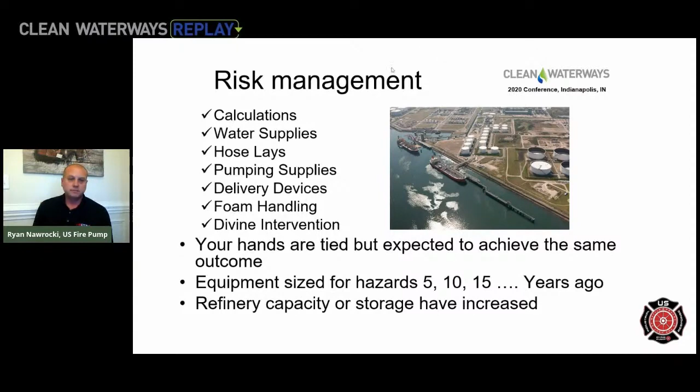So when you start looking at what it takes to put together, if you don't have fixed systems on the tank—and even then, fixed systems, if they're not actuated early on, most fixed systems on bulk storage tanks are made for rim seal protection. Once it goes to a full surface fire, the likelihood of a fixed system succeeding goes way down. So if we have to set up for an over-the-top or type 3 attack on a tank, what's going to come into play?

Is the current firewater system intact enough, and are the deluge systems activated on other tanks or other areas inside the dike area? Can we get to a static water source without having to bring in long relays? Where are we going to set up to make the foam attack? Can we spot the monitors close enough to the area? What's the range going to be?

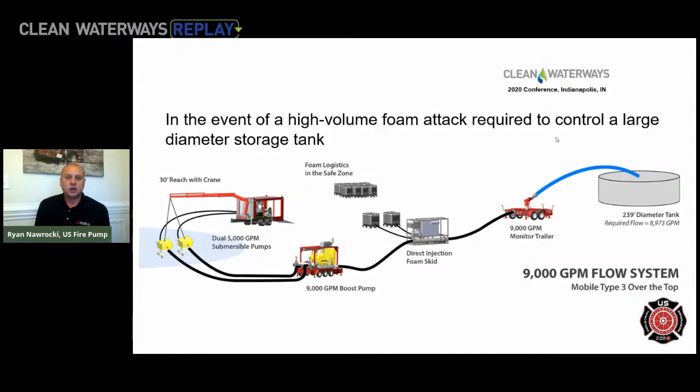So a lot of moving parts have to come into play when you start looking at a storage tank, even if it's a single storage tank. Right now, what's depicted in the picture is a 9,000 GPM flow on a 239 foot diameter tank. That does not take into effect your ancillary guns that would have to be in place, or monitors to be able to do cooling or backup in case you have a situation where the stream reach changes or you can't get effective foam coverage across the surface of the tank.

A lot of things are actually changing. It used to be the current NFPA standard was a 0.16 application rate of gallons per minute per square foot. That has since become a rewrite or revision to NFPA where that's going to be going up because they were looking at what was actually going to be out there. This allows you to look basically at what the time frame is going to be, how much you're going to need, basically what the foam concentrate you're going to have to utilize for extinguishment, and the time frame.

So maybe your standard is going to be at a 0.2 for the tank or a 0.24, depending on the size of the tank. That way you can look at, okay, how much am I going to have to flow? What are we going to have? What's our capacities and do it?

A lot of this would hopefully come into some of your pre-planning. Some of the other areas that you also got to look at is, do we have enough firewater capacity if they have the deluge system activated, or if there's other things going on. So once we know what we're applying into or what we're dealing with, then we can actually move forward of actually setting up the system.

Now, this is only identifying a single tank. You're going to take this in effect when you start adding in a potential in a dike area. If you have a spill inside there, or you have multiple tanks going in on fire, at that point, knowing what you're going to have in those areas.

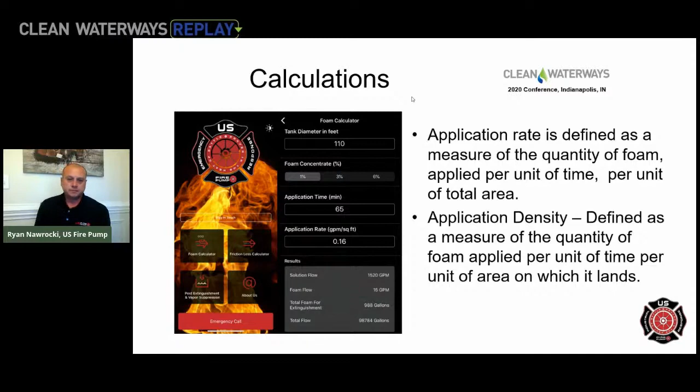So when you look at your firewater, and I kind of touched a little bit about what the firewater is going to be, most of your firewater systems are designed for your fixed firewater systems. They have a little bit more. Do they have the pumping capacity with it? What happens when the firewater pumps are down, or potentially the firewater pumps have been used for something else, if they had to use them for process water or use them for that side?

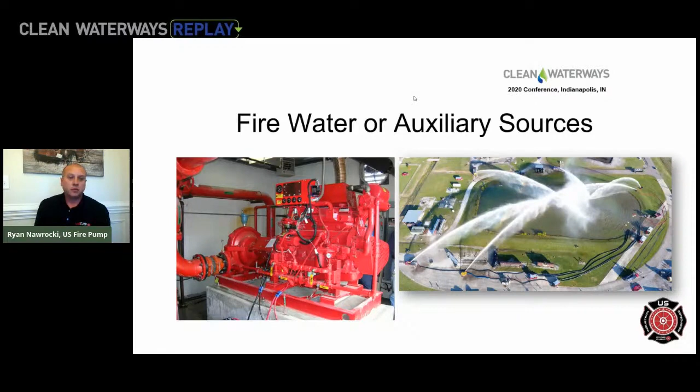Where are the other static water sources that are available? Do you have another static water source that's close to you? Do you have it in storage tanks? Do you have it in other areas that we can pull from? If you have to set up from that, do you even have the devices and the pumps to put them on scene to work with an over-the-top application if your firewater system isn't fully up, or it's being tasked at that point for capacity of the other deluge systems?

When you start looking, so now we've done the calculations and you look at your water supply. When we get into it, you look at this size tank, a 311-foot crude tank, 65 minutes, not including your cooling water. So we're going to have to be able to supply 18,000 gallons per minute of water foam solution for 65 minutes. That's 1.1 million gallons of water that you're going to have access to. Do we have that in there? Are you completely reliant on a fixed storage tank, or do you have a feed that comes in there, or are you pulling from another raw water source?

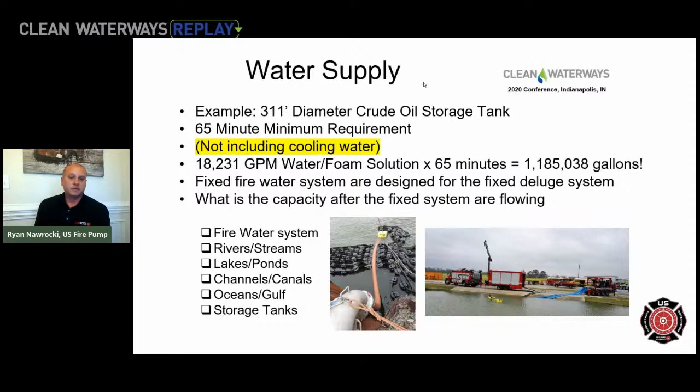The other thing to look at when you start looking at your water supplies, where's this water going to go? Can we contain it inside the area? Is it going to be able to be controlled there? Do we have other areas that we can go from? Do we have equipment that we can use for drafting, or submersibles that we can drop in to bring water up if it's above what the capacity is of the pump for drafting there?

When you look at your delivery devices, know a lot of information about the monitors that you have, whether mounted on your apparatus, mounted on an aerial device as an elevated water stream, or trailer mounted or skid mounted. What is the reach and the distance? Where are you going to have to set this up? Have you done tests on that? Most manufacturers will supply you with a flow chart and an approximate range.

That's all basically when you run the calcs, that's without foam. So you're going to reduce the range when you add foam to it, from 5 to 15% of the distance. Also, if you're not fully able to set up with the wind at your back, you're also going to reduce distance as the wind changes.

When you deal with a large storage tank, it's going to create its own type of weather around there. So knowing what your monitor can do, you can actually place it, range it, and get it in a place where you can do it.

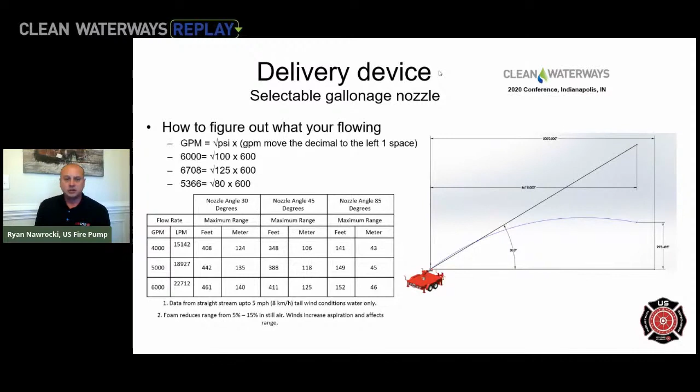Also, can you even supply it with the right amount? If you're utilizing a selectable gallonage nozzle, you need to know how to calculate: if I can't put 100 psi at the nozzle, how much am I going to get? Or if I'm overdoing it - depending on how you're making your foam, this will come into major effect on whether you're putting the right application of foam on there. If you're going for 1%, are you actually getting 1% of foam? Are you falling below to 3/4 or even 0.5%? Because you're either over-pressurizing or under-pressurizing it, so the volume coming out of that nozzle has changed.

The other thing you're looking at is your landing zones. As you get into a tank, look at the diameter where the water stream or finished foam stream is actually going to fall inside the tank. When we look at foam runs, if you have a 230-foot diameter tank, what NFPA looks at is foam can run up to 100 feet. We kind of use a conservative rule of about 80 foot for a foam run.

So basically you have to look at, once that finished foam stream lands in the tank, is it going to provide enough coverage? Or does it make more sense to have smaller streams, ones that can be controlled, land in there, get the coverage on the tank, and get a quicker extinguishment? Plus, you're looking at using less foam at that point, versus having to run longer to get your foam to seal up against the hot steel, depending on the tank you're dealing with.

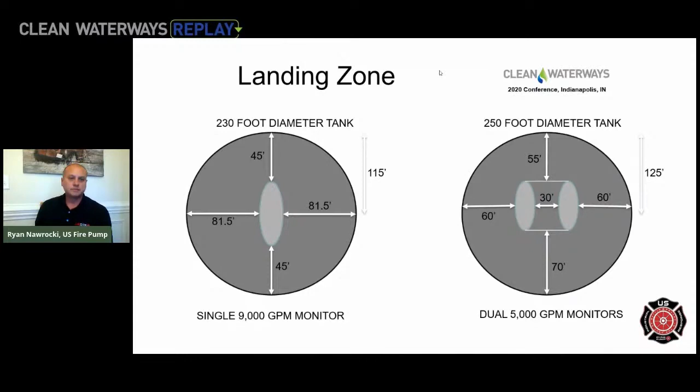Stream placement and effectivity - that's another thing. We've been talking about the range. Can you get close enough to the tank for the streams to be effective? You start looking at 2,000 gallons per minute stream, you may only have 220, 230 feet of reach on a perfect day. You add foam and everything else to it, you may be looking at a sub-200 stream reach.

You may have to look at larger streams as you get into 4, 5, 6, 7, 8, 9,000 gallons per minute - that gives you more distance, you can be outside the tank wall. Distance is always going to be your friend, especially when dealing with unrefined products. You deal with crude, you deal with other products out there - that's going to cause a potential issue because you've got to watch the time frame. You don't have as much time to deal with crude once you see the heat wave traveling through the product.

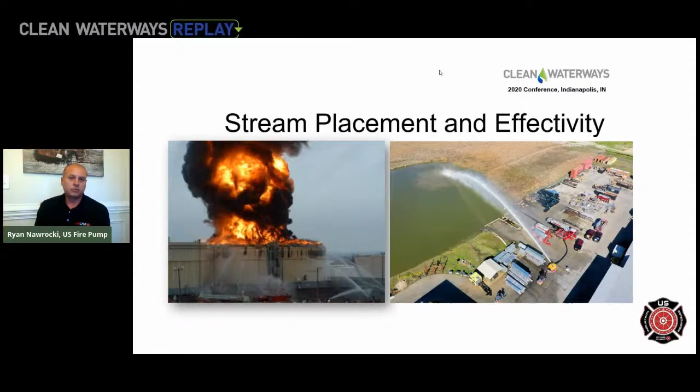Foam logistics comes into major play on these. Once you're ready and you've got your water supply established, now how are we going to make foam? Where are we going to make foam? Do we even have enough foam on site at that point to be able to handle it?

So if you're dealing with the calculations on it, you know - okay, I'm going to have to stage. Looking at a 311-foot diameter tank, for the 65-minute extinguishment shot, I'm going to need 35,551 gallons of foam concentrate to maintain a 547 gallon per minute foam concentrate flow into it.

So how are we going to do it? Do we have totes? Are we bringing in drums of this? Are we utilizing a foam pumper to make the foam? Are we utilizing around-the-pump proportioning devices?

Are we utilizing flow-based systems? Depending on how you're going to set up, can you even do it? Is it going to take that? 547 gallons per minute concentrate is a lot of foam to be able to handle with one single delivery device. Are we going to need multiple pumps or multiple engines to be able to supply the foam? The other thing to look at is time frame as you bring the foam in.

How long is it going to take us as we do it? Because once you start making your foam attack, you're going to have to maintain that foam blanket, or you're wasting the foam on the fire, on the incident, until you actually get extinguishment.

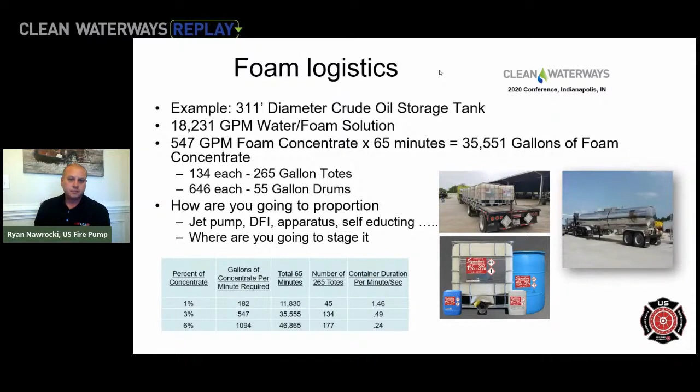What are you dealing with? We run the calcs, we look at it all the way as, okay, a single tank or this. Is it just a tank? Or are we dealing with a pump seal? Are we dealing with multiple tanks? Are we dealing with a dike fire? This is a prop that we use to kind of show different options there with it.

What happens when the crush seal gaskets give way on a tank? If it has flame impingement from a pump seal fire and then actually lights the pump on, lights the tank on fire.

What happens when you get a leak or a valve that goes out on the tank? Now you're dealing with product inside the dike area. How are you going to handle those areas? If you have to spot your guns inside the dike area, now this becomes a problem. You're moving everything back further out. So do we even have the effective reach on it?

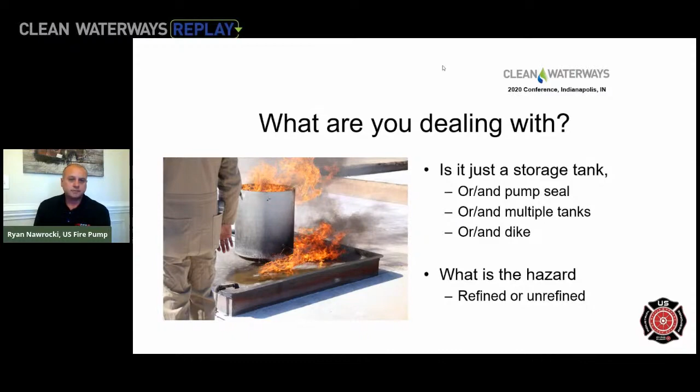Are we dealing with a refined product where we have a little bit more time? Or now are we dealing with crude oil that has a short time frame, basically once it's lit on fire, before you get into a boil over or a froth over situation? So looking at a bunch of variables that come into play.

We talked about the gun placement. Is the foam going to be able to travel across the burning fuel? When we start looking at how the quality of the foam is being made, the amount of foam required for your post vapor suppression.

Full surface tank fires, once you get them out, that's not the end of the story. You still are going to have to maintain a foam blanket depending on what type of foam you're going to use, and what the drain time of that foam is, and watching actually what the levels are coming off the tank, whether it be LELs or other products. If you're dealing with H2S or other contaminants, you need to maintain your foam blanket and keep the vapor suppressed.

So you may be applying foam depending on how long it takes to move the product out of the area for the cleanup. The hours, days, depending on what the size of the tank is or the size of the area is that's involved, to actually get it mitigated where you're not having to apply.

So just because you made your initial shot and had that foam, you need to start thinking about what the time frame is going to be to bring in ancillary foam to maintain your vapor suppression. Because once the foam blanket goes away, there's the potential, because of damage to the tank, the roof is sunken, the roof's blown off, it was burned off, whether it be a geodesic in those areas, all those vapors are going up. They're going to eventually find an ignition source.

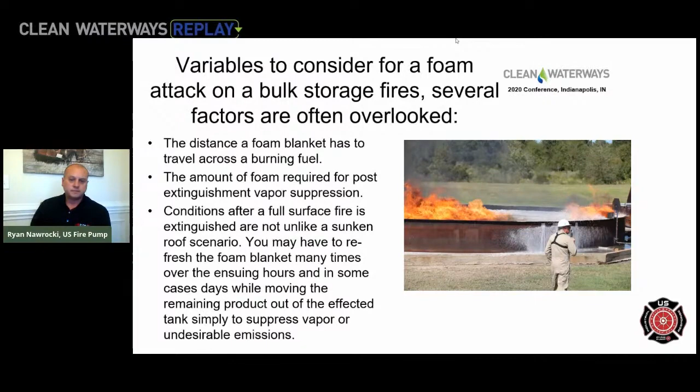When you look at your post extinguishment and vapor suppression, how long is it going to take? How many hours do you need to plan for?

Ideally, early on, start talking with your oil movements from that side. How long is it going to take us to drain out the tank farm? How long is it going to take to move this product out of this tank? Are we going to be applying foam for the next 24 hours?

Basically looking at what the drain time is going to be. Is it going to be around 37 minutes if it's an AR-AFFF, or is it less than that? What's the product going on? Weather is going to affect all this. So you got to look at what the time frame is.

The other thing to look at is how much are we going to add to, if it's maybe an open top floating tank where the roof has sunk and you're applying foam on there. How much outage do we have inside the tank? Can we withstand, say it's going to take 24 hours for us to do it, can we withstand it?

Can we withstand the time frame of adding this much product to it? If we stay at 1%, what is the amount that the tank can physically handle? In 24 hours, we're going to add almost 5 feet of water and foam solution to this tank. Do we have the outage in the tank to maintain that with the area, or are we going to run product out once we get to that point before they can start draining it off?

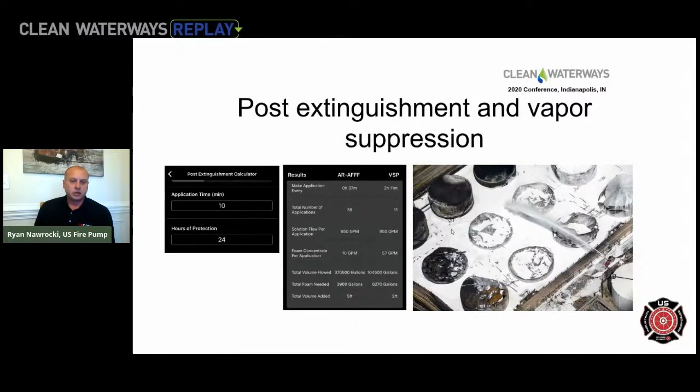When you look at the internal floating roof tank, it's probably one of the most difficult tanks to extinguish once a fire starts if there's not a fixed system. The biggest problem is, for some reason, you get product on top of that pan that starts burning, the pan sinks, or it's burning and cocked inside there. You have that vapor space between where the floating pan is and the cone roof on top. Your only options are going through the eyebrow vents on the side, if you can get set up and put it on there, or waiting for the weak seam roof to fail. Then you have more potential, because other areas can fail in the tank farm or the single tank.

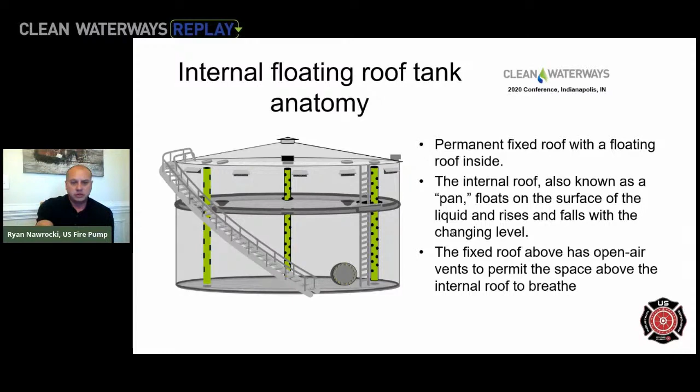So a lot of things come up when we start looking at how you extinguish those, and what are the better options that go along with it. Foam nozzles with dry chem give you increased reach and more dry chem capability. You get a decent foam blanket if you can apply it through the eyebrow vents, and you still have that vapor fire going on inside there.

Then you can turn on the dry chem and extinguish it. Most dry chem, you have to get up very close, but utilizing a fire water or foam water nozzle with the dry chem shot inside the water cone can allow us to carry it upwards of 150, 160 feet and be effective from those areas. We're looking at areas to go out further, but this gives you another tool to catch it earlier and be able to control this.

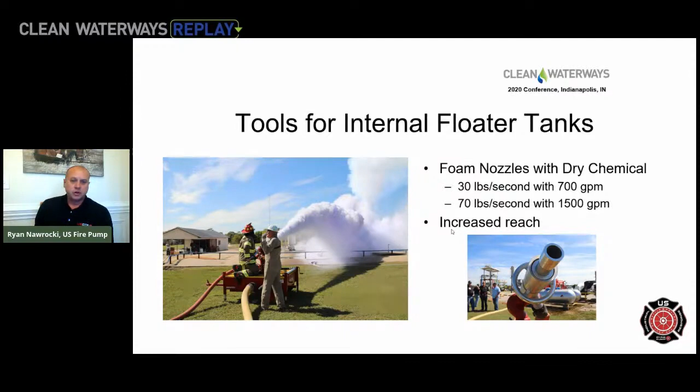Because what will happen is if you just apply foam to the tank, you still have that fire burning in the vapor space until you put that fire out. It's going to burn your foam blanket off, and then you're going to be back to a full surface fire with an internal floater.

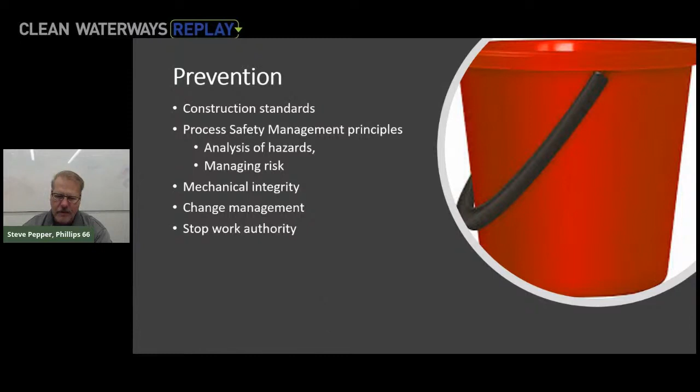Many times we see storage tank emergencies are related to human interaction with the systems. Sometimes our employees, contractors, or vendors don't feel like they have the authority to stop work and mitigate those things before they happen. So stop work authority is a big piece of the human side for preventing storage tank emergencies. Go ahead, Carrie.

So here's an example cause diagram, and I pulled this out of the LASTFire 2015 version of risk reduction options. LASTFire is an industry consortium of about 22 different companies from around the world that work together on large atmospheric storage tank emergencies.

One of the things when we think of prevention is really understanding what threats are present, making sure we have barriers to address those threats. And if a barrier fails and a threat is present, we could have flammable material out in the environment. On the other side of the cause diagram is ignition source.

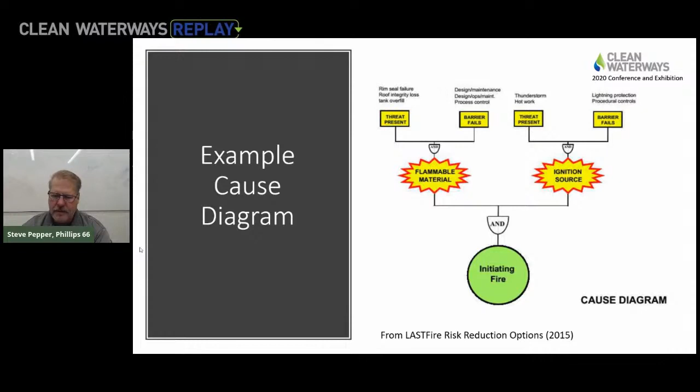So if we have a threat present, like a thunderstorm or hot work, and we have barriers that fail, like our lightning protection or our permit programs, and those two come together, then we could have a fire. So understanding the threats, the barriers, and making sure we have good barriers for all the threats present helps us prevent storage tank emergencies. Go ahead, Carrie.

So incident probability, how can we reduce incident probability? One of the primary ways is good operating practices. Good storage tank operators have good programs around their operating procedures, their maintenance procedures, their design and construction standards.

All of those things go into our practice of building and maintaining and operating a bulk storage facility. We want to avoid loss of containment, whether that's tank gauging, sampling, our level alarms, our tank inspection programs. All of those things work together to make sure that the flammable and combustible liquids we store in storage tanks stay in the storage tank and don't get out into the environment.

And then we want to avoid ignition sources. We want to have all of those barriers in place that reduce the likelihood of having an ignition source, even if we do get loss of containment.

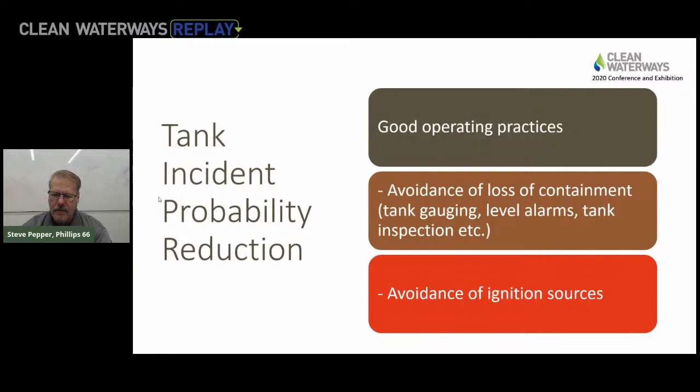On the other side, how do we reduce the consequence? So if we have an initiating fire event, how do we keep it at the smallest level and the smallest consequence possible? So incident detection, how do we identify loss of containment?

How do we have fire and gas detection? All of those things are built into the program or into the facility. Passive fire protection measures, active fire protection, whether it's foam systems, water systems, gas systems.

Incident response measures. So how do we have a response team on site? Do we depend on our local fire department? Do we have emergency response vendors like Ryan and his company that presented before?

And then emergency planning. Have we done all of those calculations that Ryan talked about? And we know what we would need in the case of an emergency. If the emergency is small, we are able to address it and prevent escalation. But if we have a large incident, we know what that looks like as well, and we've planned for all of the parts and pieces to be able to address it and reduce that consequence.

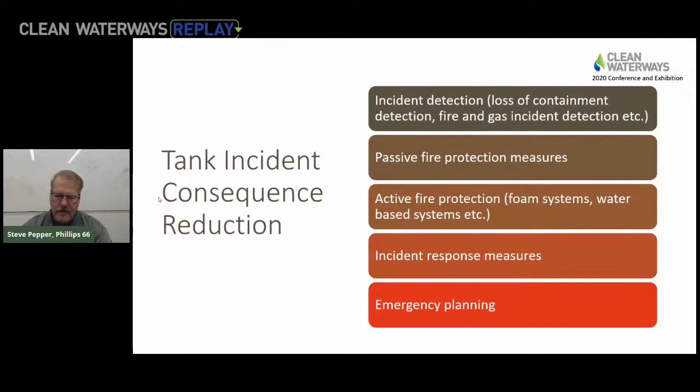Go ahead, Carrie. So when we talk about fire protection design, as an operator of large atmospheric storage tanks, passive fire protection is built in. Those are the things that we build in that you don't have to go do.

So we talk about tank spacing. The greater the spacing between tanks, the less likely for escalation to involve multiple tanks. The less spacing, the more likely that we have to have that escalation.

Roof design. One of the things we looked at in LASTFire, probably 10 or 15 years ago, was really looking at the design of roofs on tanks. Somebody had an epiphanal moment: if we have a roof that would never sink or burn up in a fire, the largest fire we would have would be a rim seal fire. Kind of let that sink in for a minute.

So the more money we put into roof design offsets the emergency response money we have to put if the roof is burned away or the roof sinks or the roof goes away. So one of the things for passive fire protection is really in that design and understanding what the threats are and designing those threats out.

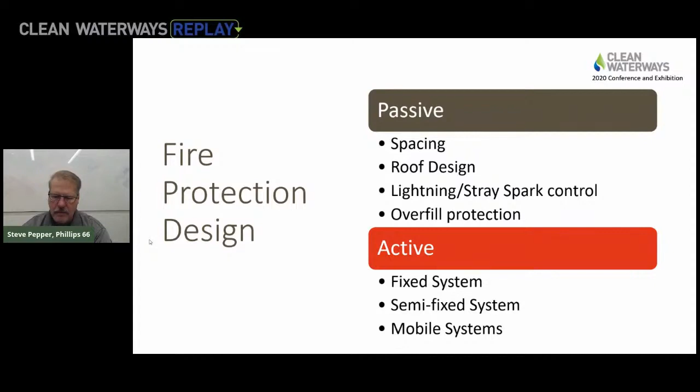So preparedness, I'm just going to spend a little bit of time here. Preparedness is all about contingency planning and engagement of our stakeholders. Do you sponsor workshops with your local LEPCs and first responder organizations?

Spend time with your regulators, whether it's the drills and exercises from the Oil Pollution Act, whether it's OSHA, risk management plans. In Texas, the Railroad Commission governs caverns, and Texas General Land Office covers the coastal zone for oil spills. So all of these things help us be prepared in the event that we were to have an emergency.

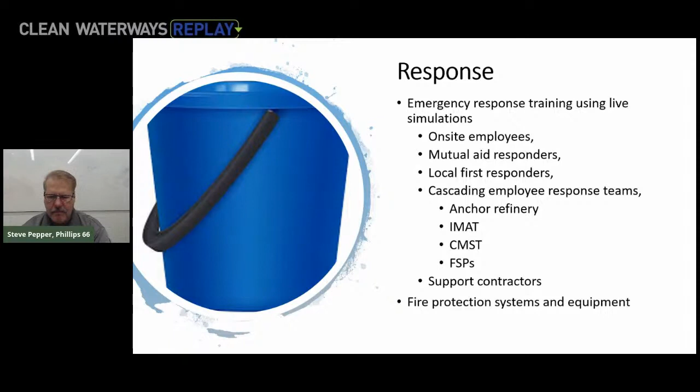So we'll deep dive into fire protection systems and equipment. Some of this is going to be a little bit of a build or companion to what Ryan talked about.

So storage tank construction. What we're talking about in this session is all about large atmospheric storage tanks. They store material that stays a liquid at normal atmospheric pressure and temperature. So the flat bottom and the flat roof are there because there's no internal pressure that requires a domed roof. There's several different types, and Ryan talked about some of them.

External floating roofs, or open top floating roofs - there's many different ways to talk about that. So the shell of the tank holds the product, and the roof floats up and down on the product as product is moved in and out of the tank.

A build on the external floating roof tank is a domed floating roof tank. So you've got that external floating roof with a pretty beefy roof that moves up and down, and then you put a geodesic dome on top to help reduce emissions that come through the seal area.

Internal floating roofs and cone roof tanks. An internal floating roof looks like a cone roof tank with a thinner floating roof that keeps the emissions down inside the tank. And if the seals are in good working order and the roof is in good working order, there's really not a flammable mixture above that internal floating roof as it moves up and down the tank.

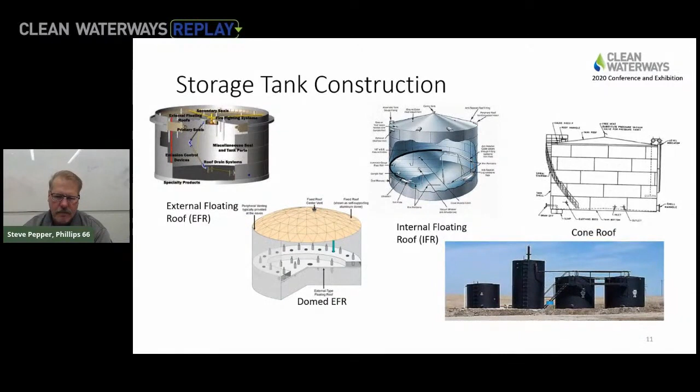So what kind of fires, what kind of emergencies can we have with the large atmospheric storage tank? Rim seal fires are the most common, and that's when the rim seal around the roof has a failure or a leak and some ignition source, and it just burns in that annular space between the roof and the shell of the tank.

It could have a product spill on the roof that catches fire. If the roof either sinks or is removed and the whole full surface of that liquid burns, or we could have a fire in the bund area around the tank, or we could have a combination of multiples of those.

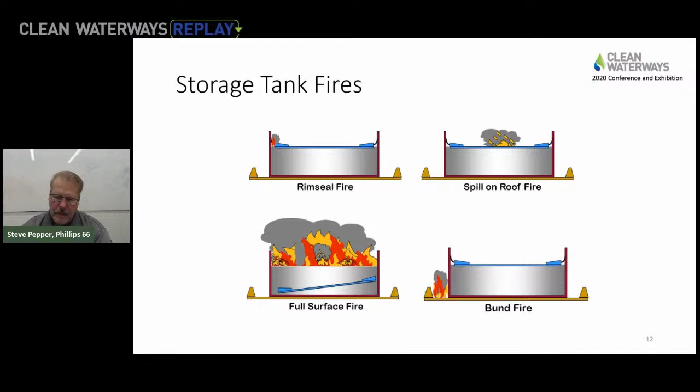So if we have a fire and we need to suppress the fire, we need to deliver some kind of suppression media. Ryan talked about foam systems, he talked about dry chemical systems, and he talked about all these different pieces that make that up, whether it's water supply or foam concentrate supply, how we move the fluids from supply points to delivery, how do we mix the stuff together, and then how do we put the juice onto the surface of the liquid.

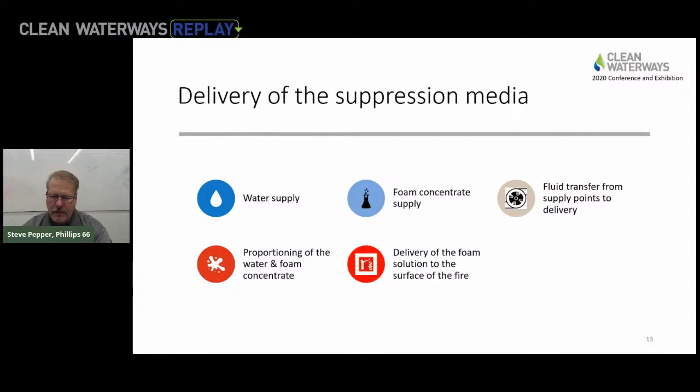So water supply, Ryan talked about, whether we pull it from a tank, or I call it infinite volumes, pulling it out of a river or ocean or some very large body of water, or tanker shuttling. If you looked at those little oilfield tanks, there's probably not a hydrant anywhere close to that, and to get water to do that kind of firefighting may require tanker shuttle operations. If you have a large or small atmospheric storage tank and tanker shuttling is your operation, you really need to understand what that looks like and plan for what happens if it escalates. Where are you going to get water for escalation?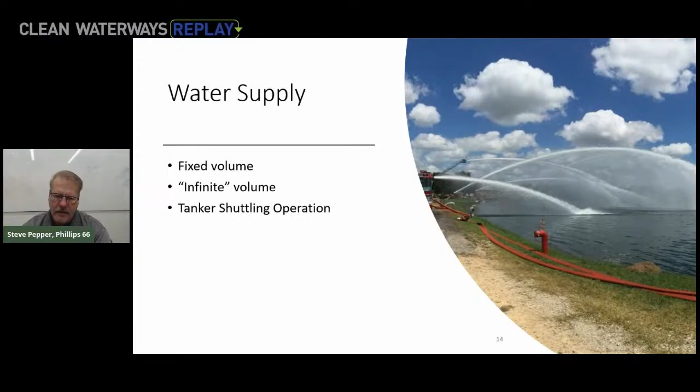Foam supply, Ryan talked about this pretty well. Whether you're using 5-gallon buckets, 55-gallon drums, totes, big 18-wheeler transport trailers, or foam tenders that may have 3,000 to 5,000 gallons of foam concentrate in them, somehow you're going to have to put all of your foam concentrate supply into a location that you can easily get it to proportioning and to the delivery device.

Many times that's not really well thought out, how do I work the logistics of foam supply. Until you really look at what that 18,000 gallons of foam concentrate that Ryan talked about looks like in a field to be able to deliver to the delivery device, it can really change your perspective of where you put your foam supply and how you work that.

Fluid transfer. So do we have the pumps, whether they're stationary pumps or portable pumps, the piping systems, our hose, and our appurtenances and appliances? Ryan talked about equipment that we may have had that's 10, 15, 50 years old in different facilities that were built a long time ago.

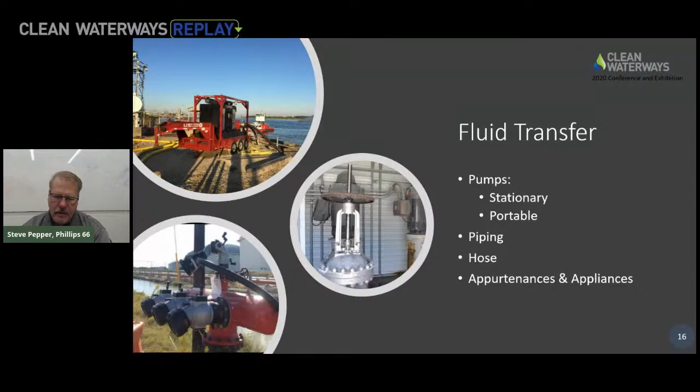If we're using 2.5-inch hose, which was popular when I first started into the emergency response business, we would need 135,000 feet of 2.5-inch hose, and we'd have to lay 90 2.5-inch hose lays, 1,500 feet, to get that amount of water to put onto the tank, versus 3 12-inch hoses, so 4,500 feet of 12-inch hose.

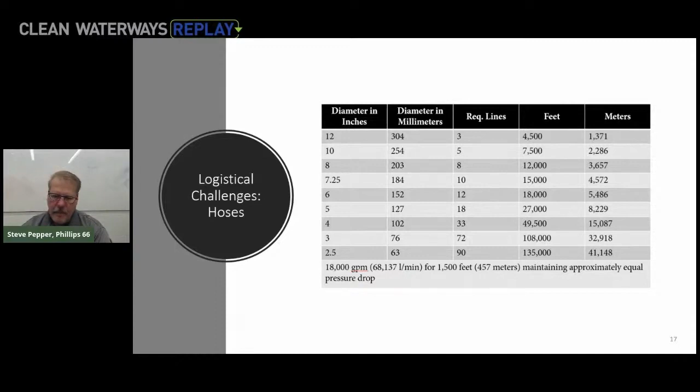Mixing the fluids. So whether you're using in-line or bypass eductors, or you're using your balanced pressure or around-the-pump systems on your engines, you have to have the appropriate way to mix the foam concentrate with the water to get it into the right mixture to put it onto the fire.

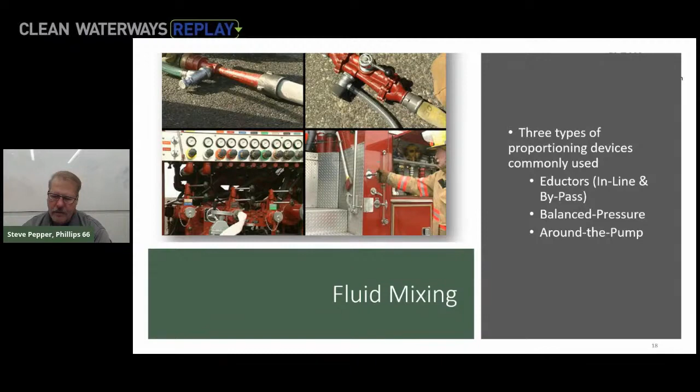And then applying the juice. So whether you've got an engine as your primary delivery device, that's one of our recent purchases, a nice 8,000 GPM main deck gun with two 2,500 GPM deck monitors on the back. That gets us for our largest tank in that facility. That is our delivery device, all the way up to the picture on the right, a Williams Bigfoot 14,000 GPM monitor on one trailer. So deck guns, portable monitors, trailer mounted monitors, or engineered systems.

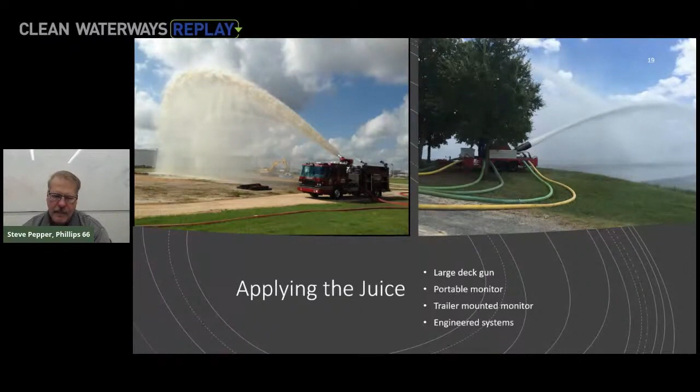So one of the most common engineered systems that we see out in the industry is a semi-fixed system. You've got foam chambers or foam makers on the side of a tank, and the foam piping runs out either through or over the dike wall, and the foam engine or the trailers can pull up, proportion, and put foam solution into the pipes. It makes its way up to the chamber, gets air put into it, and it flows down the wall of the tank gently into the seal area. Or if it's sized appropriately for full surface and it's an internal floating roof, it may flow across the whole surface of the tank without having to climb the tank or get on the tank to put that foam solution in.

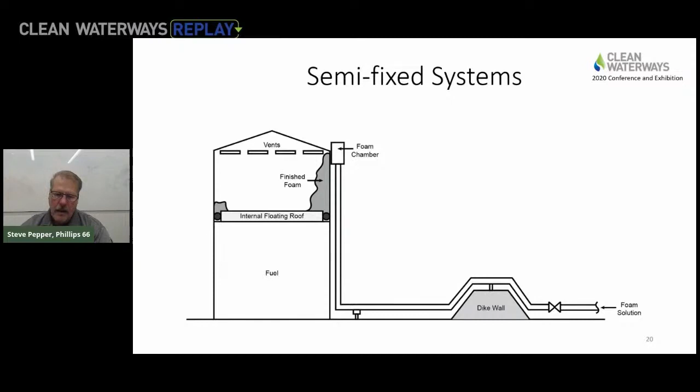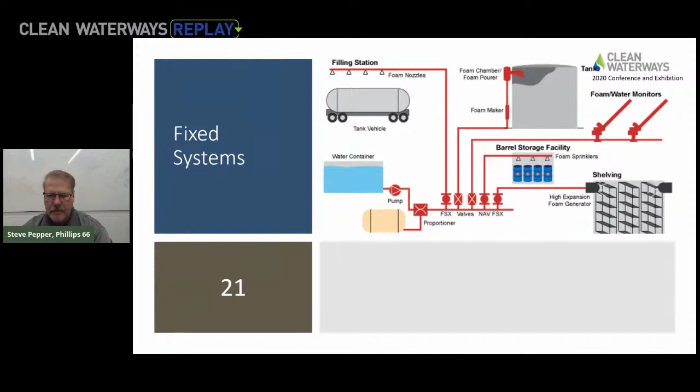Next, you could have a fixed system - one that has a water container, pumps, foam storage facilities, and then it goes out automatically through different control valves or systems to put that foam into the areas where you need it, whether it's sprinkler nozzles, foam makers, or monitors. A nice engineered system makes that easier. We talked about logistical challenges on hose.

Just got a few pictures. As you start lining things up to get all of the water that you need, make sure you think through: how am I going to position the different apparatus? What apparatus do I need to achieve the flows I need for my facility? Who has them? Where can I get them? Do I have everything that I need, and how am I going to put it down? When you start laying large hose on the ground and fill it with water, it's really difficult to change your mind and move stuff. So you've got to have a good plan, and plan through those logistical challenges, hopefully before you have an emergency.

Some future foam challenges. Ryan talked a little bit about, do we use foam, we don't use foam. There's a global discussion going on about the different firefighting foams we've used in the past and what we should be using in the future. Some of the challenges we've seen moving from a fluorine-based or fluorine surfactant-based foam like AFFF to a synthetic fluorine-free foam is application rate.